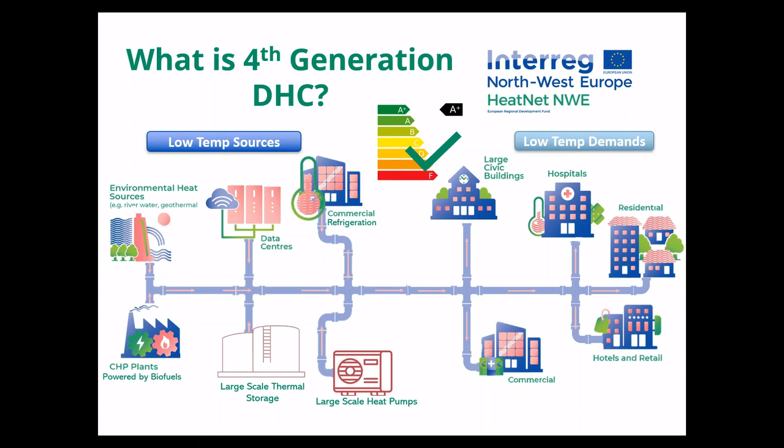And importantly, not only is fourth generation about lowering the temperature of the network and the supply, but also looking at integrating more renewables into the district heating systems. So moving away from traditional gas-fired and fossil fuel-fired combined heat and power plants to more renewable sources of heat, such as combined heat and power plants powered by biofuels and large-scale heat pumps using renewable electricity. So one of the things that the fourth generation systems can do is to actually integrate the electricity and heating sectors.

So without going into too much technical detail, what it can do is use electricity from the grid at times when there's a lot of renewables, so a lot of wind power and solar power.

We can utilize that to produce heat through large-scale heat pumps and store this in large-scale thermal storage. These are just large storage tanks which are highly insulated - an extremely low cost way of storing energy, much cheaper than batteries or any electrical storage systems. We use that thermal storage also to

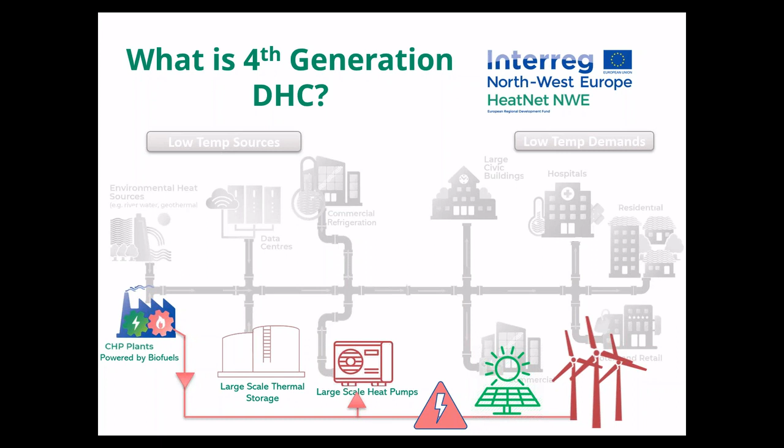use CHP plants, renewable combined heat and power plants, to produce electricity at times when there's not so much solar and wind available. In that way we can help increase the amount of renewables on the electricity grid while also increasing renewables in the heating sector, creating an overall smart energy system by integrating the two markets together.

And this is obviously done much easier at this kind of scale rather than trying to control hundreds and thousands of individual heating systems.

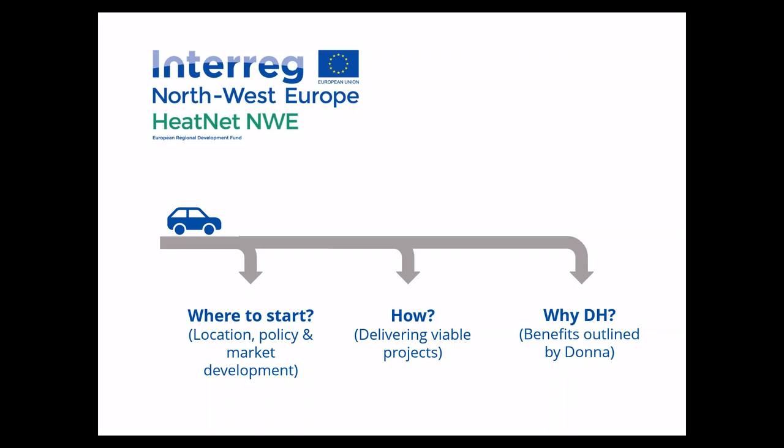As Donna outlined earlier, there are many benefits, and that's the reason we get in the car in the first place and go on this journey. Then I'm going to jump off with where to start in terms of location, policy, market development, and then I'll go on to the step-by-step approach, which makes up the bones of the roadmap.

The second part is supporting the development of low carbon heat networks in potential areas. We'll touch a bit more on what makes up a potential area later. Then, once you have designated zones, including a requirement to future-proof any developments within that zone for connection to district heating in the future.

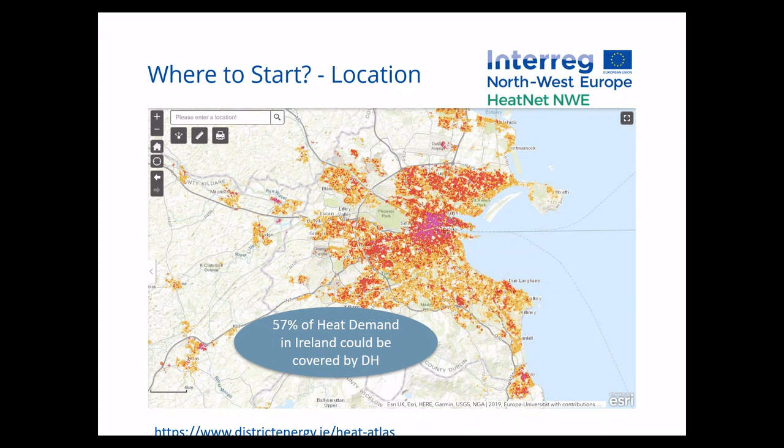Getting into the heat sources, this is the approach that was taken with the South Dublin transition roadmap. We covered 17 different heat sources in that study using 70 different sources of data. They're broken down into three main sections: commercial, infrastructural, and environmental.

For example, you might have some industrial processes that generate heat that is currently either being sent directly to drain or is escaping through a flue as hot gas, and all these things can be utilized in a district heating network. Then you have certain items like CHP, which is combined heat and power. Basically, connecting existing CHP may offer an opportunity to increase the overall efficiency of the unit and increase its run hours and generate more electricity on site, which is very beneficial for sites which have CHP installed.

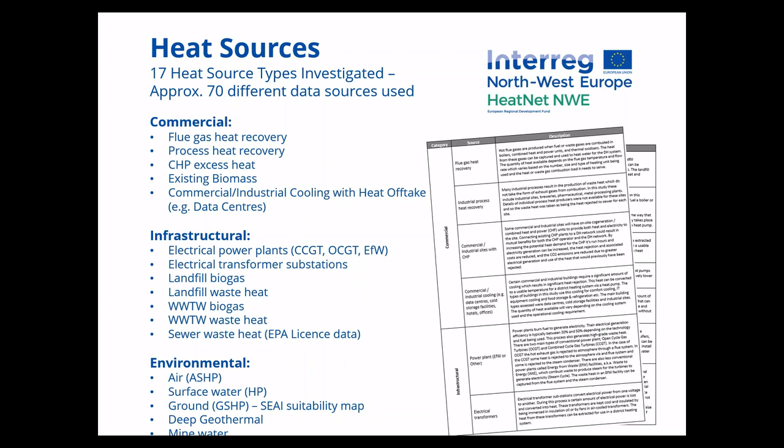So this is just a map of the heat sources that we have processed. As you can see there, there's a few large clusters of data centers. And as you'll notice, the large grey area - that's actually the Dublin Basin, which represents a large opportunity in terms of deep geothermal. There's also a large number of surface water spots there, where we had data available on flow in rivers, etc. And we have industrial waste heat sites there in green - that's things like flue gas heat recovery.

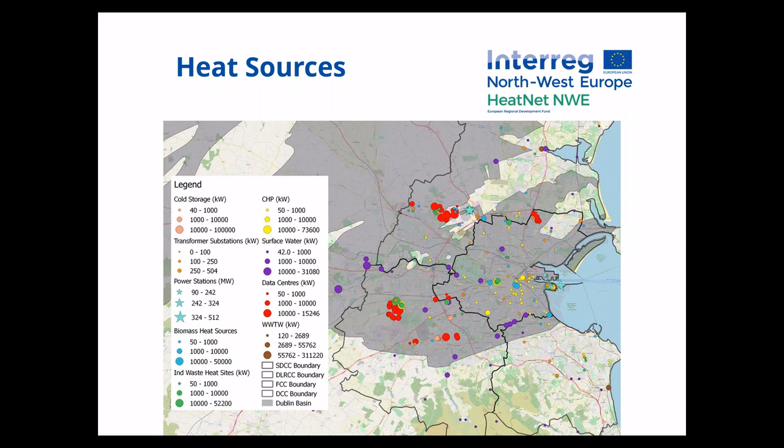So on the next slide - this is just a summary of our findings from the South Dublin study. We found that there was 493 megawatts of heat in the South Dublin area that could be utilised, spread over 115 different heat sources. It's worth noting as well that the surface water figure on this one is quite conservative, because we took the dry weather flow and assumed that all rivers were fisheries, and therefore had a constraint on how much their temperature could be changed before it would have an impact on the fish.

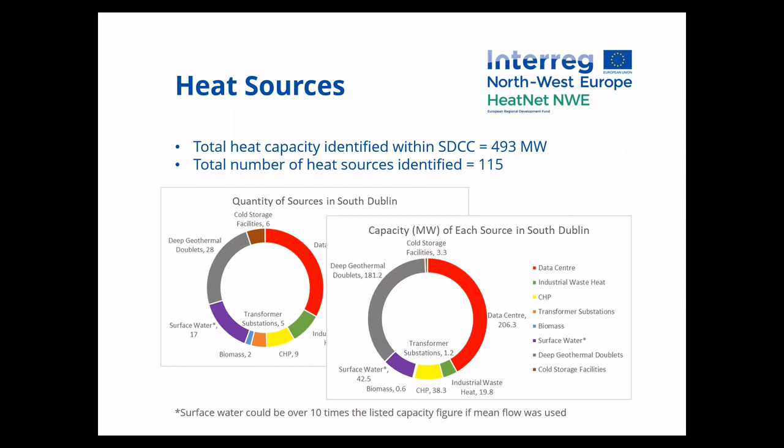So these are seen as good areas to catalyze a network. They've got the sufficient heat demand. And then we've obviously overlaid the heat sources on top of that.

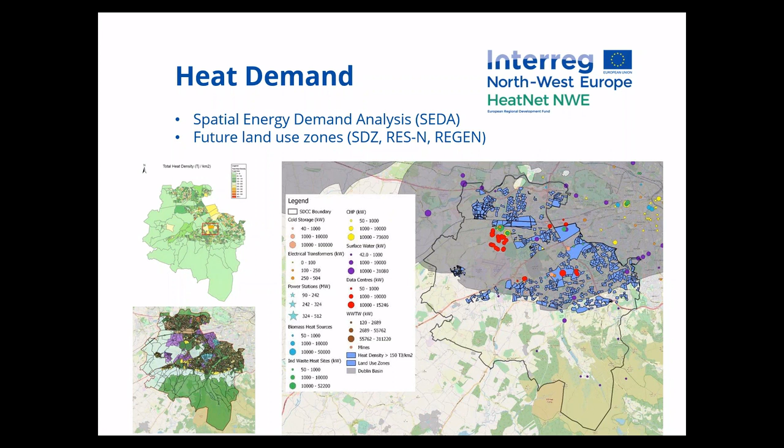And then the other thing is the physical obstacles. There'll be many obstacles to installing the network, or complicating it at least. So things like waterways, railway, major roads, heritage sites that might need to be avoided, special areas of conservation. So you just have to be cognizant of all these things as well.

And it's probably worth noting as well that things such as roadworks could be aligned with the installation of pipes to reduce civils costs. So the outcome of that then is we've basically taken the demand and the sources and drawn a line around areas where we feel would warrant further investigation in terms of a feasibility study. And then we've ranked them on the left-hand side there.

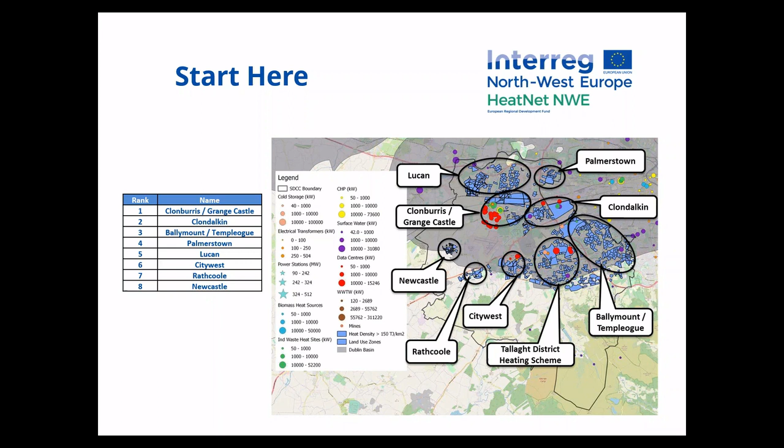Step 3 then is to understand the drivers of each stakeholder, and in doing so you have a better understanding of what they're looking for from the scheme, and you'll be able to keep your engagement relevant and more focused. And it's also worth noting that some of these drivers may be positive and some of them may be negative as well.

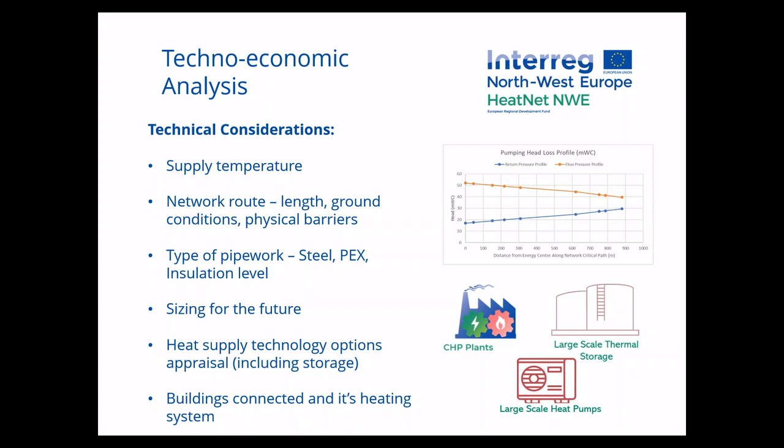There's also a number of procurement options available. So for the Tallaght scheme, we adopted a competitive dialogue process, and that ticked a lot of the major boxes for us in terms of it was suitable for a complex project like this. The technical risks would be assigned to the person who's best placed, so in this case, the energy supply company, and it also allows us to retain control of the system.

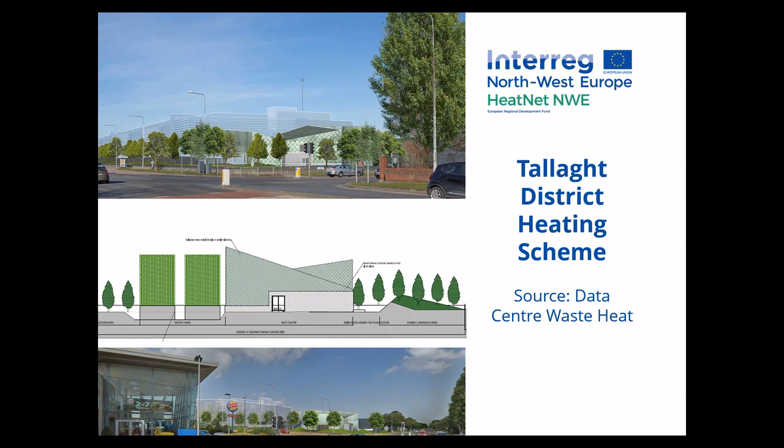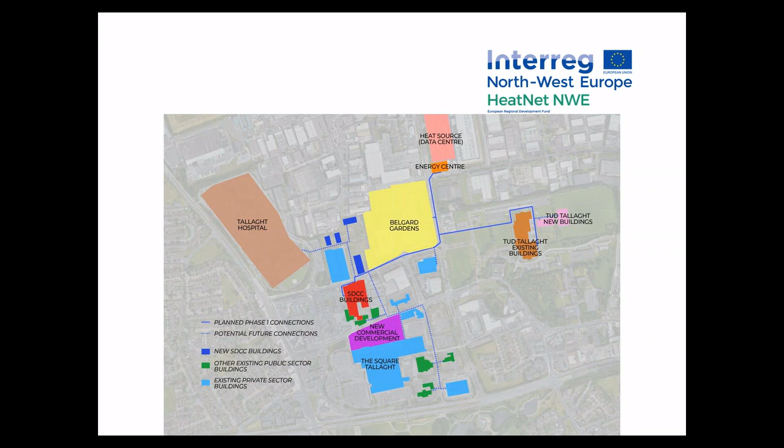And I guess the element in this which people mightn't be as familiar with is the heat pump. So a heat pump essentially works like your fridge in reverse. So where your fridge takes heat out of your fridge and vents it through the back through a coil, this will take heat out of the data centre and will pump it into our district heating network.

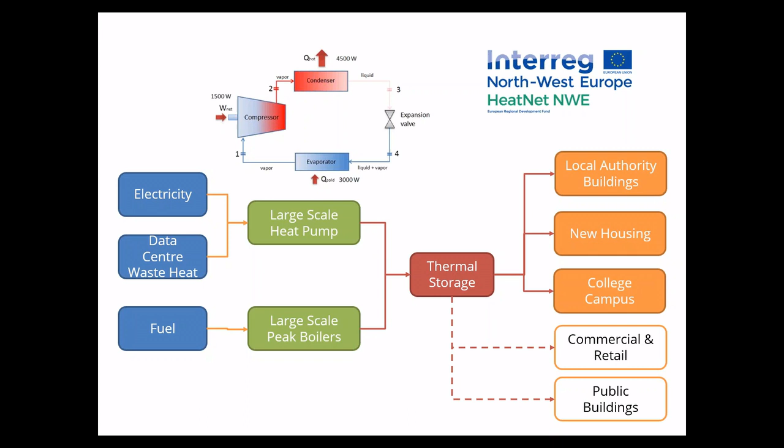So some of the benefits then for the Tallaght District Heating Scheme: it utilizes the waste heat, which currently has no value, and it provides cooling to the data centre as well as heating to our district heating network. So it has a very high combined efficiency. It's an integration point between the electrical network and a heating network, so that allows balancing of the grid and greater utilization of renewable electricity. It has a high potential for replication due to the growing number of data centres in South Dublin, which was shown previously on the map.

It also contributes to the local authority's CO2 and energy efficiency targets, and it also provides low cost, low carbon heat to residents in the Tallaght area.

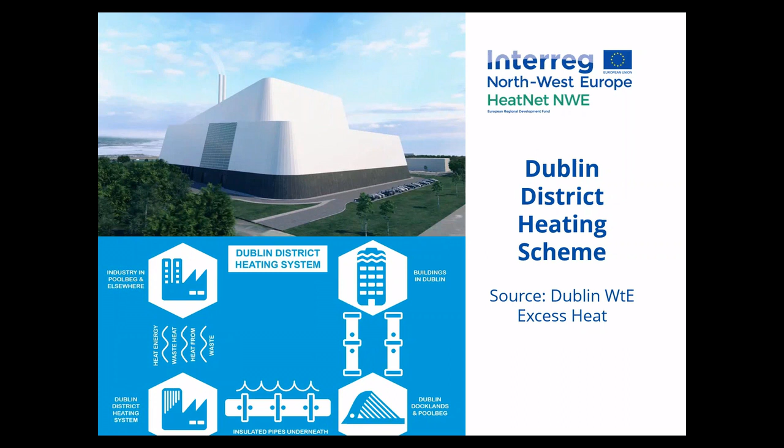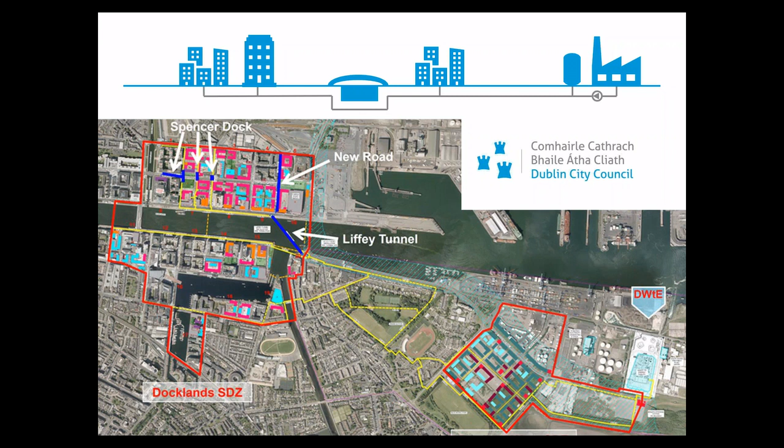And the second emerging project in Dublin then is the Dublin District Heating Scheme. So this is being developed by Dublin City Council, and the heat source for this is the Dublin Waste to Energy Plant. And essentially this system will start with the Poolbeg SDZ and will carry on towards the Docklands area and passes under the River Liffey. There's a pipe that's already been installed under the Liffey through a service tunnel, so that's already in place.

And just quickly, some of the benefits for that area: it utilises the waste heat source, that is the waste to energy plant, and again contributes to Dublin City Council's CO2 and energy efficiency targets, provides low cost, low carbon heat to Poolbeg and Docklands area, and decreases Dublin's reliance on imported fossil fuels.

Yeah, so that's the end of my presentation now. So we're going to do a Q&A session. I think we have some questions that have come in. That's great, John. Thanks a million for that. And thanks, Donna. So I think two very interesting presentations. Hopefully that'll give you an overview of district heating, fourth generation district heating in general, and then also some of the steps needed to roll that out in terms of municipalities, public authorities.